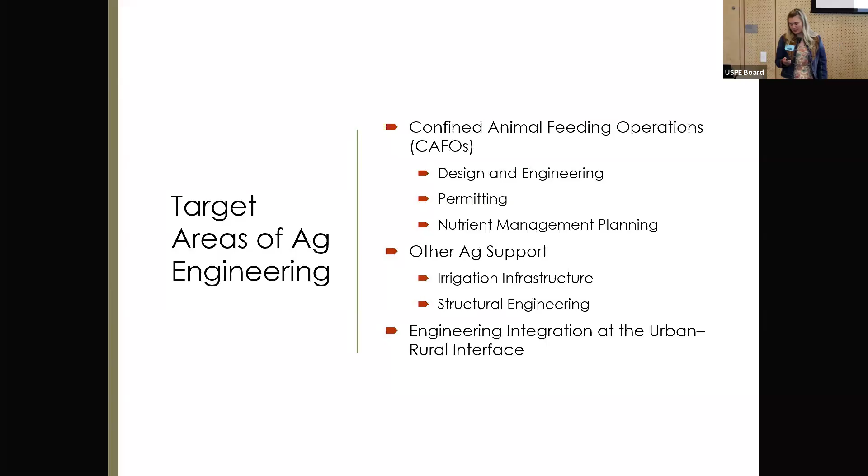So confined animal feeding operations, CAFOs. The EPA, from an environmental standpoint, CAFO regulations fall under EPA. So I went ahead and pulled the definition. An animal feeding operation...

Operations are agricultural operations where animals are kept and raised in confined situations. An AFO is a lot or facility, other than aquatic, so this does not count fish - that falls into a whole other area - where the following conditions are met: animals have been, are, or will be stabled or confined and fed or maintained for a total of 45 days or more in a 12-month period, and crops, vegetation, forage growth, or post-harvest residue are not sustained in the normal growing season over any portion of the lot or facility. So pastures where cattle are grazing out there, or chickens are free range, that does not fall under the definition of an AFO.

AFO is usually anything under 1,000 animal units, and then it triggers a large CAFO, which is above 1,000 animal units. This standard changes from state to state as EPA has delegated regulatory oversight to the state entities. It's typically about 1,000 animal units, and usually 1,000 pounds equals 1 animal unit. So if you're milking those big Holstein cows, they're usually about 1,400 pounds, so about 700 of those is considered a CAFO. Again, states have different regulations, and so do the counties, which I'll dive into next.

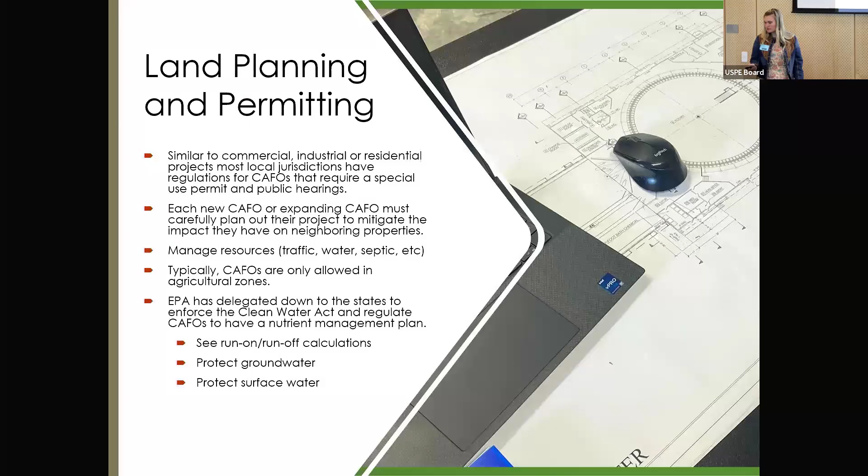Water management, similar to the last presentation, is huge. When you're dealing with stakeholders and limited water supply, water management is a huge priority, especially in Idaho and Utah, where water is scarce and limited.

Water rights are done through prior appropriation, first in time, first in right. So making sure that new uses, a new facility for example, has gone through the process of transferring those water rights and has the available water to feed those cows, and making sure those water rights are fairly senior too—it would not be good if there was a call and the cows couldn't get water. So making sure that's well planned out.

There's a lot of technology in the recycle and reuse of water on most confined animal feeding operations, whether beef, dairy, poultry, or hogs. A lot of feed yards, in the winter, will overflow the water troughs to keep water movement so they don't have to thaw out the water tank. They'll recycle and treat that water and reuse it. The dairies reuse the water 3, sometimes 4 times before it ever makes it to the lagoon. Being very mindful of water is really important, especially in the Western United States.

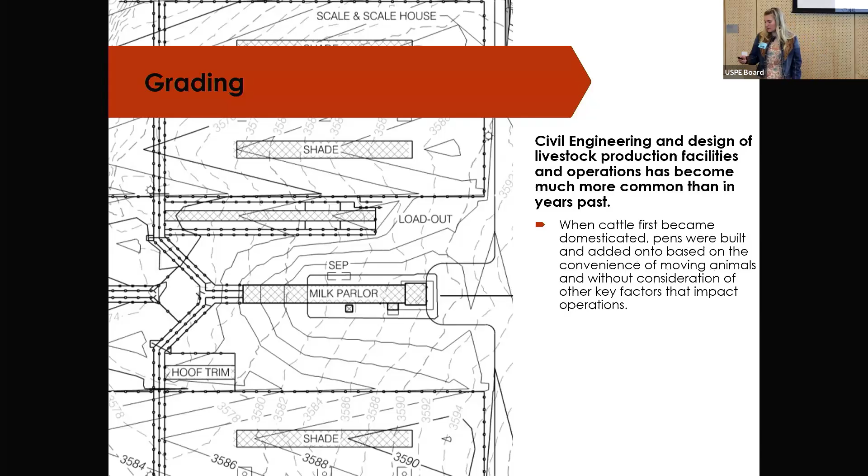So we now do full-on grading and drainage plans, similar to what you would see in a municipal project. There are definitely different considerations with that, which I will talk about. The key one is proper drainage, and we want to keep the cleanest facility we possibly can.

The things we consider when we lay out a facility are going to be your traffic flow. Where are your commodity trucks coming in? Where's the feed stored, and do you have a good access point from there? Less overlap with traffic, just like you would consider where your employees are coming in versus where your delivery trucks are coming in, is really key.

And then inside, how are the animals flowing? What's the shortest path to get to the milk parlor? What's the shortest path to get to the cattle handling facility? And what's the best way for employees to move cattle efficiently?

Locating your commodity and feed storage - feed prices fluctuate very dramatically, but it's a huge input cost for these operations. So how can we efficiently store our feed for the facilities by keeping it dry, by reducing the amount of wind that comes in contact? Shrinkage for some of the facilities is really huge, which is a loss of feed. So how do we design buildings and locations where we can control feed?

And then the most important is the animal comfort, making sure the cows are well cared for and they have good dry footing in these facilities.

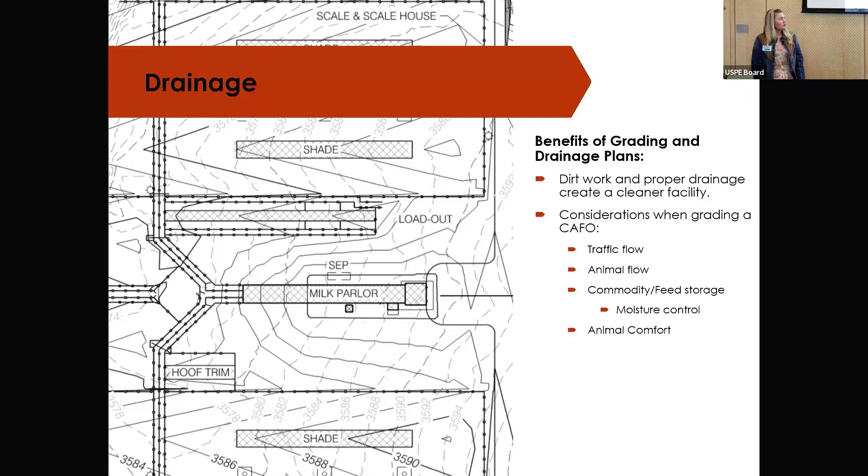The next one is structural. Similar to grading and drainage, structural has become more and more prevalent and important. CAFOs are moving to indoor housing and climate control.

You see this a lot in the poultry and hog industry. Most of those facilities are now enclosed, and dairy's starting to enclose their cows in large cross-vent barns. I tell people it's sunny, 65 degrees, 365 days a year, and you walk in and it's like you're on the beach. There's a nice breeze and the cows are happy. So a lot of guys are starting to look at those opportunities and bring those animals inside.

So there's a lot of structural engineering, a lot of times they're large steel structures, just like you would see in a warehouse. But we help lay out so that the cow traffic doesn't run into a column. So we still have to lay out columns, footings, and foundations to meet the internal side of it.

And then we also have to consider management, because a lot of times the floors of those buildings are concrete. So where is the manure going to go? Because the cows are still producing manure every day. So how do we keep those facilities clean on a day-to-day basis and handle that manure as well?

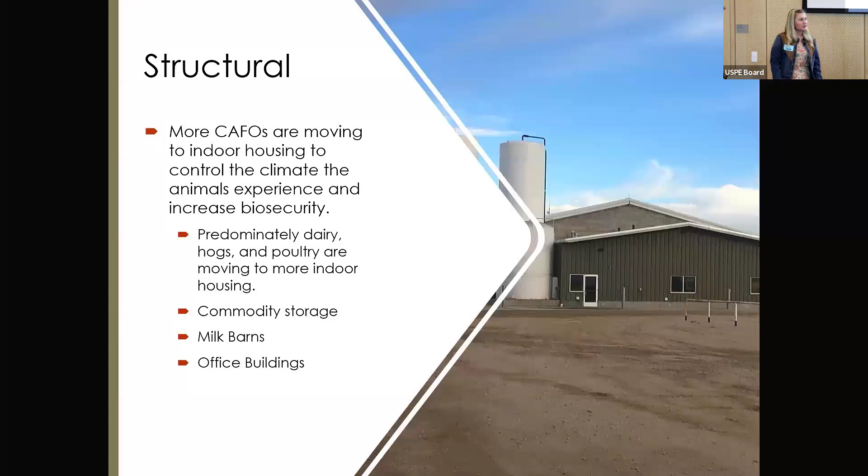And then office buildings - a lot of guys are either adding them onto the dairy barns, or beef feed yards will have a nice office building at the front where employees can hang out, with a coffee machine and restrooms and so forth in them.

So a lot of times we'll help with the building permits. Most counties, it's ag exempt. The milk barns do dabble in commercial, as a product is being produced on site. So that's kind of the difference - animals can house, but once you start producing a product, milk, it'll transition to commercial.

We look at floor plan and flow. For steel building design, a lot of times we rely on the pre-engineered metal buildings and their reactions to design our footings and foundations. Some guys are building their own steel building or constructing it on site, so we'll do the structural as well.

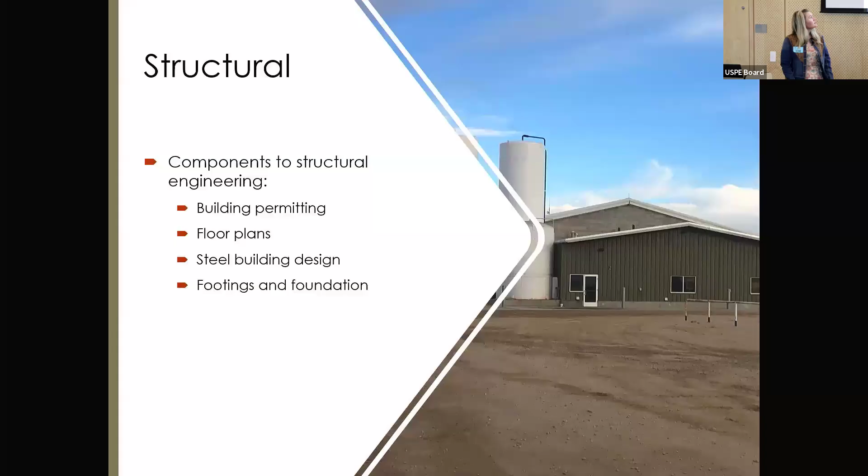Manure management - it's very important. One of the first things I was taught early in my career was, you've got to keep your clean water clean and your dirty water dirty. And so keeping them separate is very, very, very important.

And I think this is applicable to all water management systems - diverting the clean water that could potentially run onto your site around the facility, and any water that hits roofs, that's clean water if it hasn't come in contact with manure. Once the water comes in contact with manure, it's got to be handled through the manure handling system and stored in a lined impoundment before it's land applied to the agricultural fields at an agronomic rate.

So making sure that hydrology and hydraulics come into play, making sure our diversions are sized - typically the storm events are 25-year, 24-hour storm. That's kind of our standard design storm. And then making sure our lagoons are sized appropriately to hold all the winter storage.

You can't land apply manure water when the ground is frozen and crops aren't growing. So you can get a fall application in, and then you can get a spring one in, but we've got to have 120, 180 days, depending on the region of the country we're in, where they can't land apply. So balancing that - if you're in Hawaii, they can apply 365 days a year, which is nice, but you have to balance the rainstorms. So it's figuring out your region and the hydrology of that area to keep that in check.

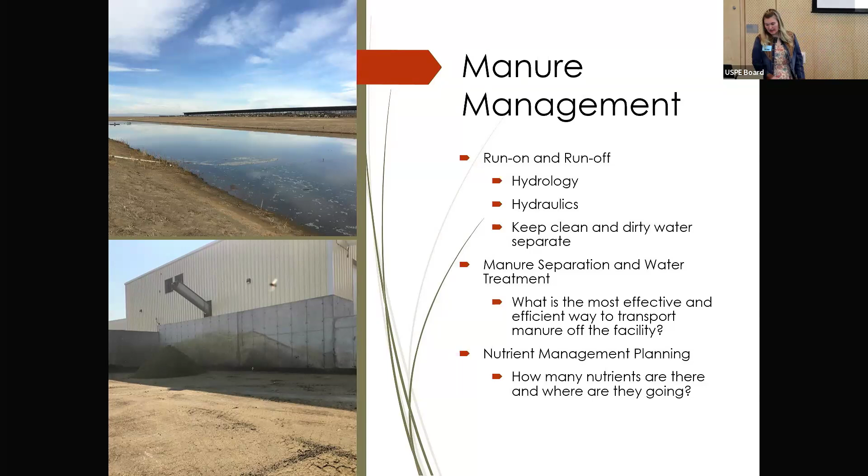So some of the manure separation and water treatment - there's the typical gravity systems, and I have guys still installing these because the power goes out and it rains, your gravity system's not going to fail. And so these are settling cells.

The picture in the lower left hand is a feed yard I worked on. These are actually designed, it's concrete, but the pens run off and then it slopes over to the lagoon. But these were designed to work as concrete settling cells before it got to the lagoon so that they could get a loader in and clean these out really easily without getting into their large lagoon and having to clean those out. Those large lagoons are 10 to 20 feet deep sometimes with 3-to-1 side slopes, and it's really hard to get equipment in, and it's expensive to get it in. So if we can get a lot of the solids captured before going to the pond, it makes a big difference there. It's pretty rudimentary, but it's pretty efficient at what it does, especially on runoff and rain.

So you'll see it on a lot of open lot dairies and feed yards as well. There's weir structures too that are gravity. You put 2x4s essentially, and it seeps through. Some of them are weeping walls, weeps over and then flows over there. So there's a variety of different gravity methods that a lot of guys use. I have some clients that'll still argue that they just want their gravity system because they know it'll work and it works every time. So it depends on how much water, that sort of thing. A lot of times these are great in low water facilities and high desert areas.

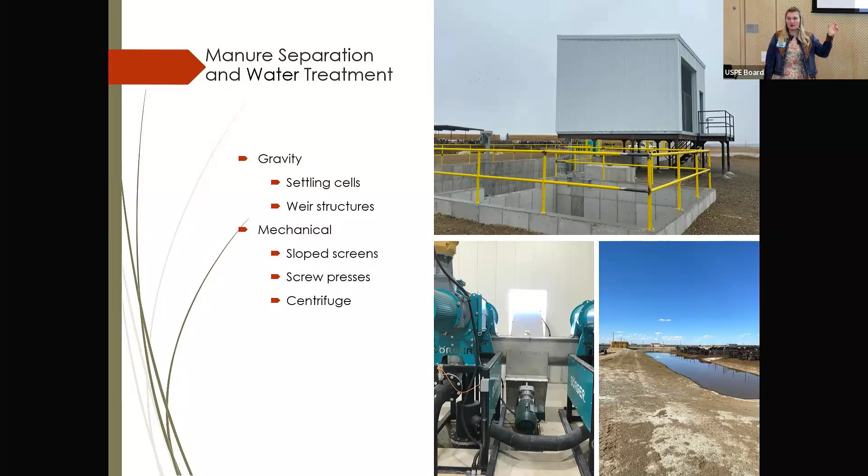Getting to the mechanical side of things, the top one has a sloped screen in it. I should have probably pulled a picture out for you, but essentially it runs the water over it, and the mesh screen catches the solids, drops it out, and then the water heads to the lagoon as well. So it's a mechanical form of separation. The lower left is two screw presses, which I'd say are the next level of separation. Then you get to the centrifuges, which you'll see in some wastewater treatment facilities as well, and those get really expensive, but they're very, very effective. So it's analyzing what your ultimate goal is with your nutrient management plan and how much money is worth spending on this kind of equipment to get to the ultimate goal of the project.

So nutrient management planning, there's engineering involved, but a lot of this is on the agronomy side. We have agronomists that help us take soil samples and manure samples and analyze, based off the yield goals and the type of crop, how many nutrients are going to be pulled out with the crop. So analyzing how much nitrogen, phosphorus, potassium. We also look at salts, especially in desert areas, which come out of our irrigation naturally. There's a lot of salts, and salts are a very plant-limiting thing. It's not necessarily a soil problem, but plants have a really hard time using salts at all. So trying to reduce the salts that are in irrigation water and manure water is really important.

Samples are taken from all the manure sources, and this happens annually and sometimes biannually, depending on how a facility operates. So solids, your compost, your dried manure, slurries, whatever's going to go to the field, needs a sample on it. That includes your liquids, your ponds. You can see in the bottom left-hand corner some samples that I took from a facility, and we have lots of poop jokes, but I'm going to leave those for another day. All the farm fields that will have manure applied to them also get soil samples taken, and we do a nutrient balance for those facilities.

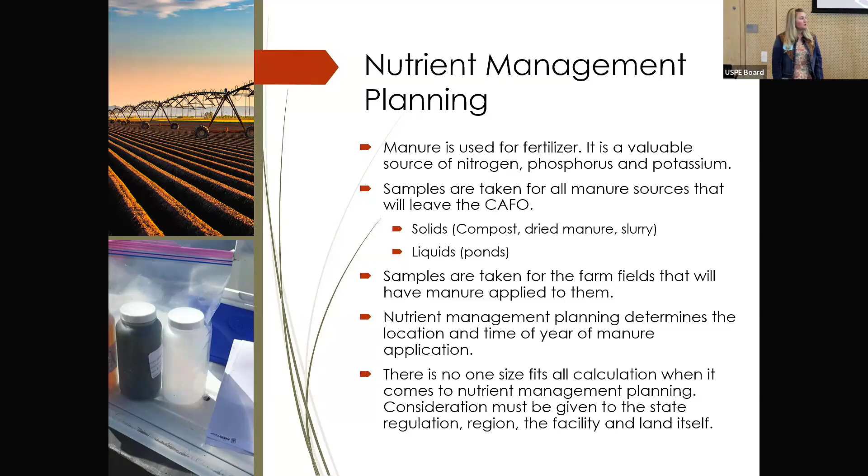A few of the value-added opportunities we're starting to see are anaerobic digesters. You have to have enough manure for this to work, so a lot of feed yards don't do it. I'd say poultry operations have manure that's very dry on the backside and not conducive for anaerobic digesters. But dairies and hogs are primarily where you'll see a lot of digesters, and they're taking the manure and turning it to biogas. We've got one facility that converts it to electricity. They use it for heat, or they scrub it into renewable natural gas that they'll inject into the renewable natural gas pipelines. So a variety of different availability for those.

It's pretty incredible how much engineering goes into these facilities. We plug in on the manure handling side, but the amount of chemical, biological, electrical, and mechanical work that gets done is remarkable.

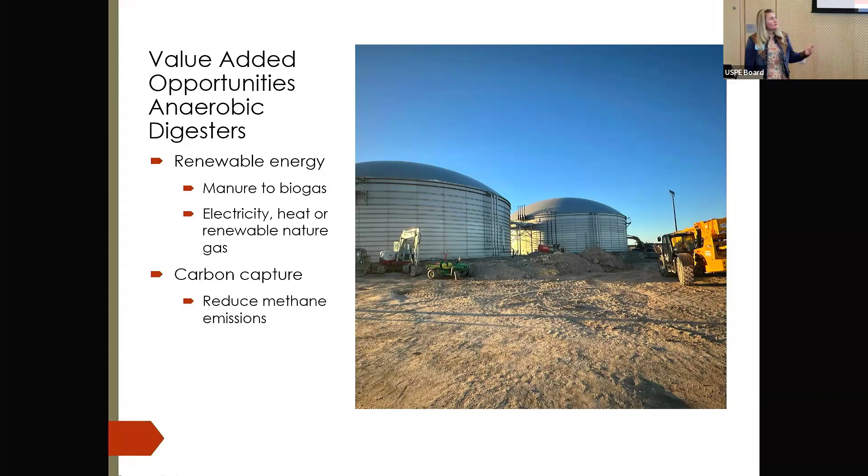To be honest, don't ask me about the bugs that make the system work, because I know the beginning and end, and what happens in between is usually left up to somebody that understands this a lot more than I do. It's helping with carbon capture and reduces methane emissions from the facilities as well. Pretty cool opportunities, and some are up and running while others are still working out the bugs. It's new technology trying to find that optimum gas production while also making it usable for the dairy as well.

Water treatment - I already kind of talked on this, but the facilities are working really hard to get to potable water. Places like Colorado, where cities are buying agricultural water at ridiculous prices right now, are forcing guys to figure out what to do with water. This is one of the opportunities, taking your lagoon manure water coming out of the barns and runoff, and treating it to potable water to be recycled, either through reverse osmosis, ultrafiltration, and some chemical treatments and polymers as well. I'm not going to dive too much into it - I'm not a chemical engineer, and some of that biology is over my head, but it's pretty remarkable that we're at a point this is starting to become scalable. We're still figuring out the cost to run it every year, which is the pinch point.

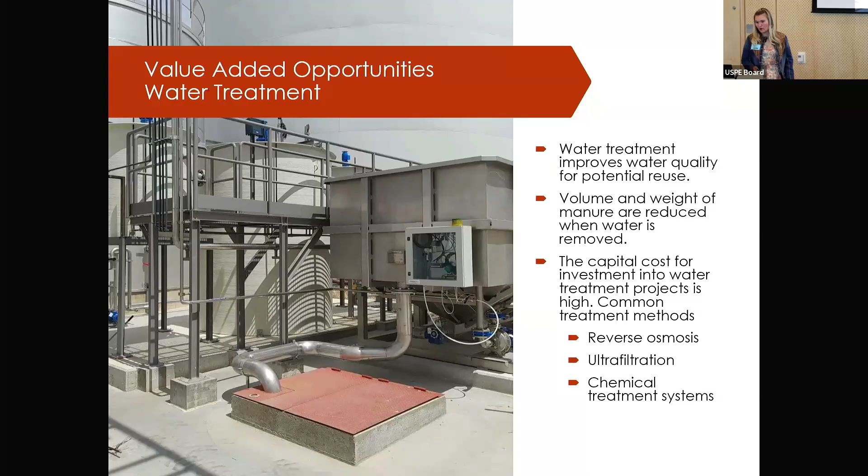A couple other ag areas we touch: irrigation infrastructure. I won't spend too much time on this since John did such a good job in the first presentation, but we do a lot on the downstream side of the dams. This is a weir structure we've worked on to divert from a canal down to a smaller ditch and then over to a pond, making sure the canals and engineering is such. A lot of times the canal companies use engineering, but they've done it for so long they know how water works, so we make sure to plug in where we're needed without over-engineering it.

Those guys know how their systems work, and more and more areas are starting to line canals too. In Twin Falls last year, we had 2 or 3 canal breaches - voles, mice, or gophers burrow a hole through and burst out the whole side of the canal. So they're starting to line canals that have really soft soils to try to protect those areas. Some cool things are happening in that realm, and the canal companies are doing a great job.

Groundwater irrigation too is a big thing in parts of Idaho and Utah, pumping out of the aquifer. Wells have to be designed to pump at a rate that the pivots can use. And you've also got to respect water rights too in this, which could be a whole other presentation in itself.

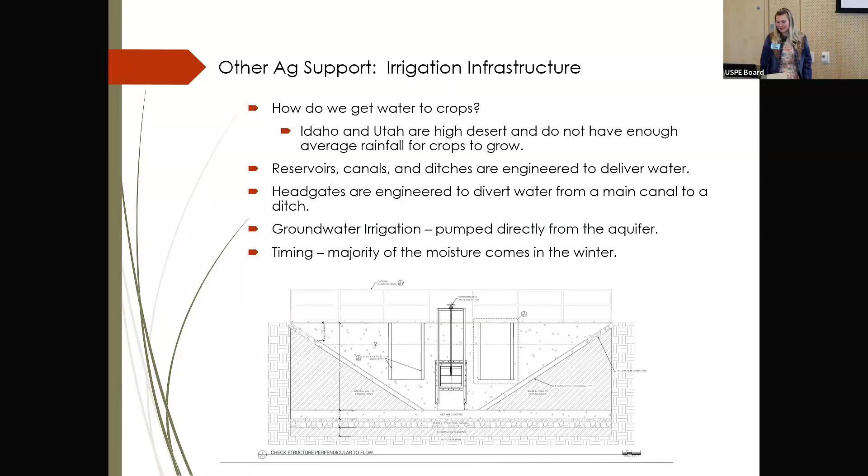Some other ag support structures we've done: a lot of foundation pads for grain bins and silos, and chemical and fuel tank pads. It's really important to make sure those footings and foundations are sturdy, because those grain silos are huge, and if you get a little settlement with a big load of grain or chemicals, they'll just collapse. So making sure those foundations and anchor bolts support that and create a safe environment for employees to work around is big.

Equipment shops and sheds - we do a little bit of work on those. A lot of times the companies know footing and foundation sizes and overdo it just to get in and get out. Ag likes to spend as little money as possible on engineering costs, which for a little hay shed is totally fine. And irrigation pump houses and control stations - we've helped with a few of those too, making sure there's enough room to move around in, and the structure is built to standards that allow people to be in there.

The last area I'll dive into is just some food for thought. One thing we're noticing more and more is the urban-rural interface becoming closer every single day. One quick example: my family farms and ranches in southern Idaho, and when my grandfather homesteaded there was nobody there and hardly any irrigation. Now we've got an Amazon distribution center you can see from my parents' house. It's crazy how close this is all getting, and development is good, right?